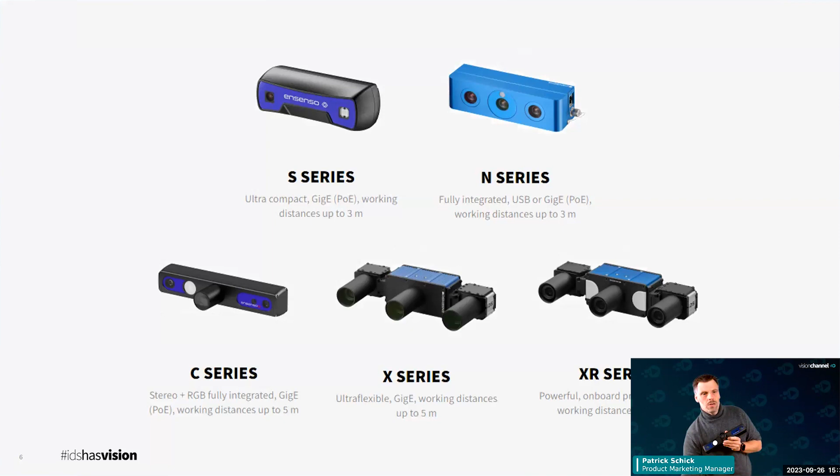But additionally to this, the Ensenso C also comes equipped with an RGB camera, as you can see here, which extends the usage of the camera to all cases where not only a 3D point cloud, but also an RGB image is necessary to do the job, or even the combination of both. Let's have a look at some applications which heavily profit from this feature later.

Besides the RGB camera, the Ensenso C is also equipped with an internal light to be able to take images also under not optimal lighting circumstances.

And last but not least, the Ensenso C comes in two baselines to cover working distances from 0.5 meter up to 5 meters. We have here the Ensenso C57-S with a baseline of 240 millimeters. And additionally, we have also an Ensenso C57-M, this one here, with a baseline of 455 millimeters.

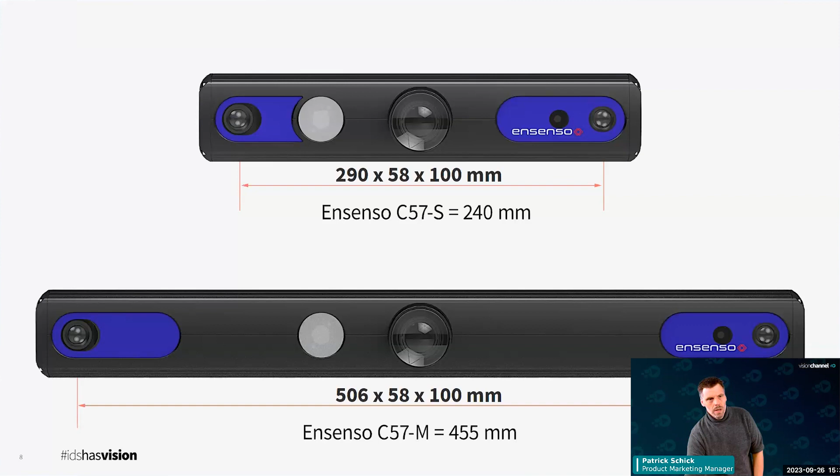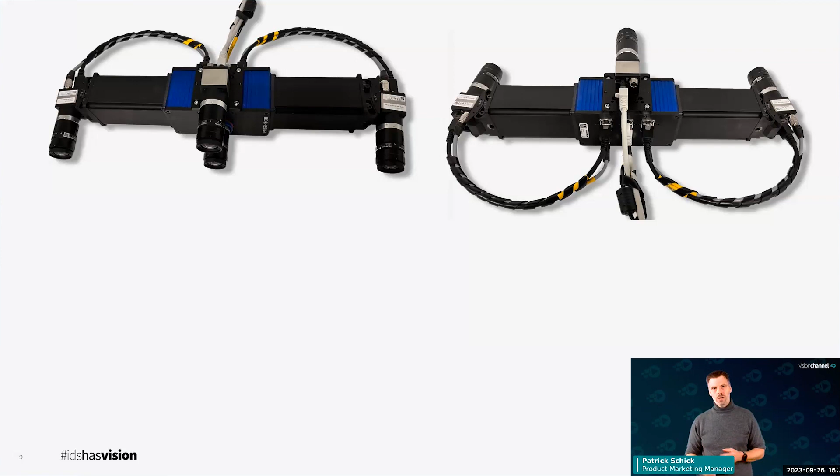To give you a glimpse of comparison, to summarize the first part of this section: if you compare the named features realized, I'd say you can immediately see that the C series comes as a fully equipped 3D and 2D RGB camera in a slim housing. And if PoE is used, only one cable, the Ethernet cable, is necessary to work with the camera.

I gave you here an example of how an Ensenso C, or Ensenso X, or also an Ensenso N setup would look like with the integration of an RGB camera, and how slim and fine it looks when you use the Ensenso C.

So we had a first look at the facts of the camera. Now let's have a closer look at applications which are realized, or can be realized, with the Ensenso C camera.

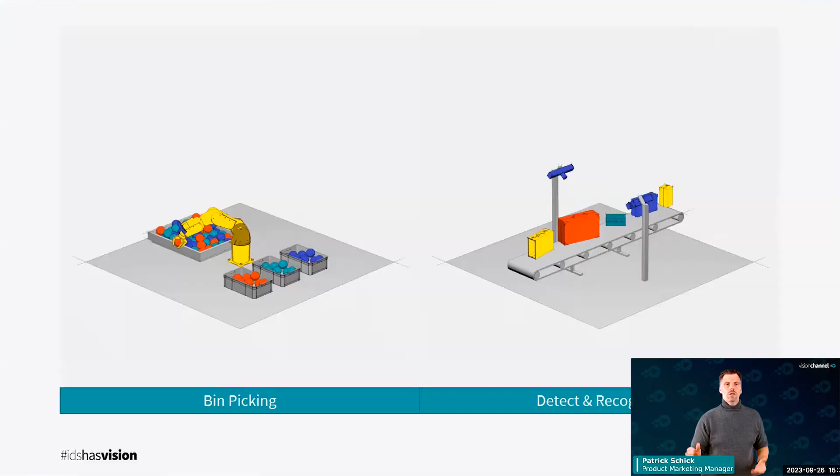First of all, as you can see here, we have a classical bin picking application on the left side. As with any other Ensenso camera, you can solve a bin picking application, but with the additional feature that here you have the possibility to not only pick the items, you can also sort the items by color, in this case, based on the integrated RGB camera.

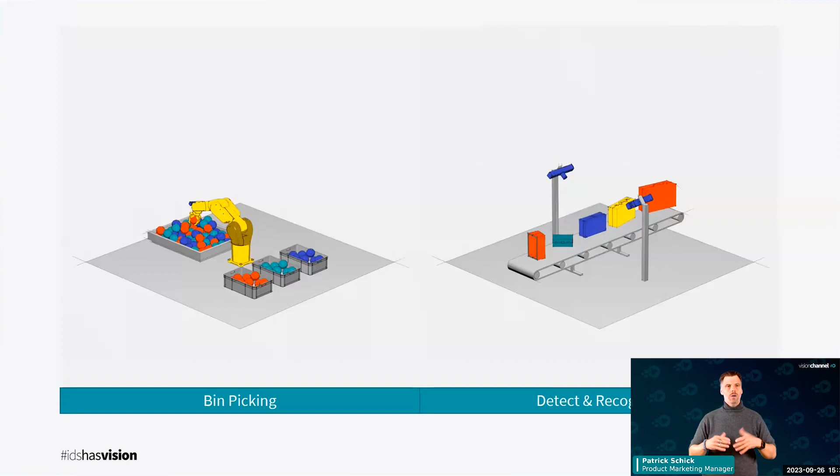So one value ahead, if you have an unsorted color box, you can just sort them also by color, pick and sort. On the other hand, we have the detect and recognize feature.

You can directly check, for example, luggages, or inside of logistics, if it comes to parcels, you cannot only check the size and measurements of the object. Additionally, you can also document the outline, and even also, again, we have an integrated RGB camera. You can also document the texture and everything else.

So the RGB camera also brings back to mind that with every Ensenso camera, you have access to a mono image. For example, as you can see in the image here, if you have in logistics parcels, you cannot only have the size and the position of the parcel. Also with the mono camera, you can read barcodes or text on these parcels.

And this is not a special feature of the Ensenso C camera. This is a feature of every Ensenso camera. Every Ensenso camera gives you the ability to use a mono image for further tasks.

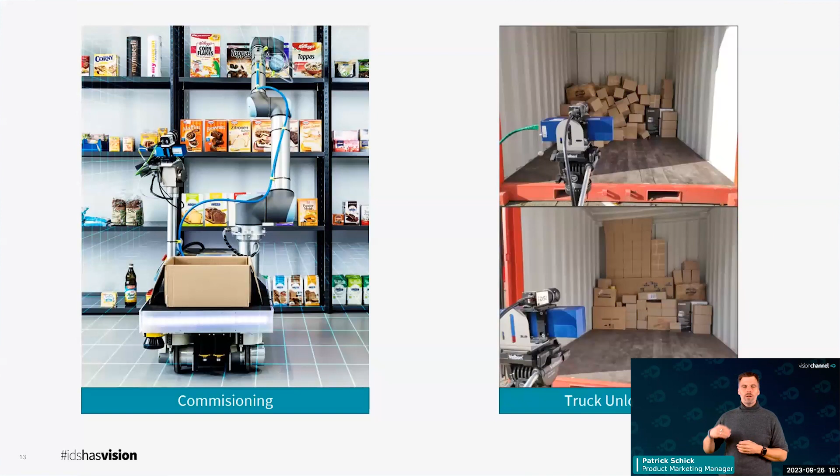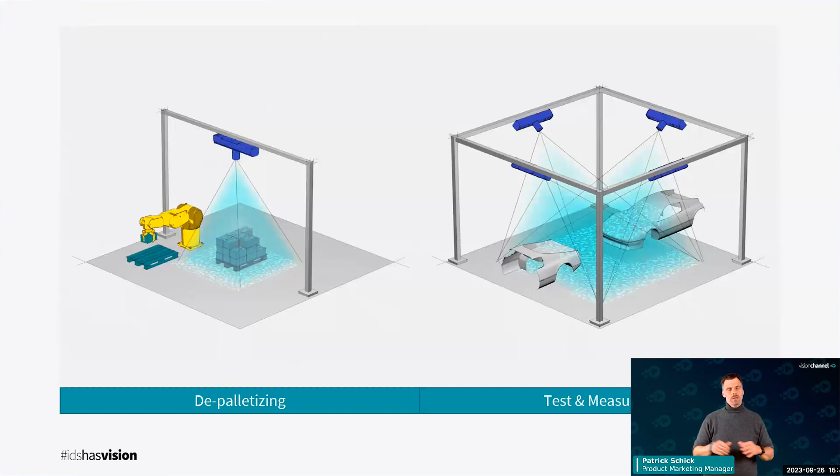So on the left side, we have again a depalletizing application. As you can see with the Ensenso C, if you, for example, use the one with the bigger baseline, you can completely oversee a pallet and get the quality to pick those single boxes from the pallet. On the right side, when it comes to test and measuring, you can also combine the Ensenso cameras together and then measure and check the quality of, for example, those car bodies.

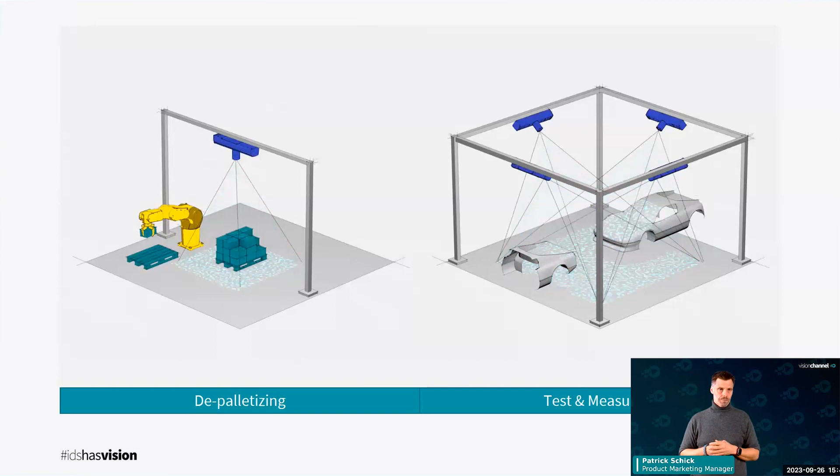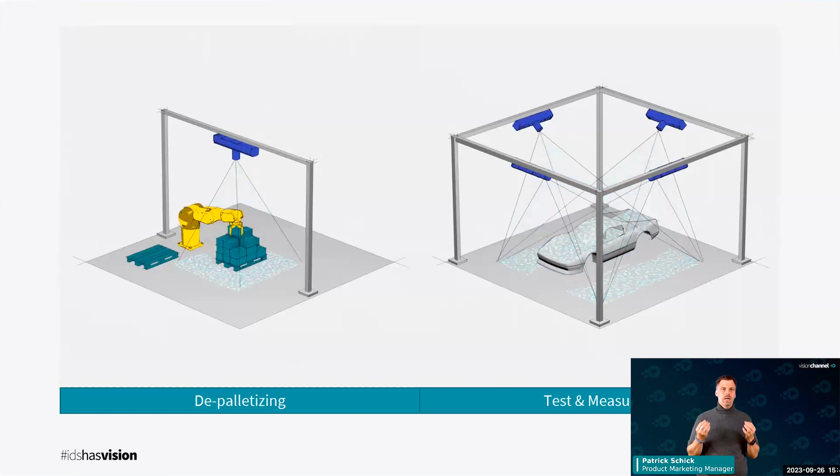Again, a feature which comes with every Ensenso camera: you can combine the Ensenso cameras into one system, let's say. So you can calibrate them together, and then you get one single 3D image out of, in this example, four Ensenso cameras. So with one shot, you can do a complete 360 degree check, for example, again, of these car bodies.

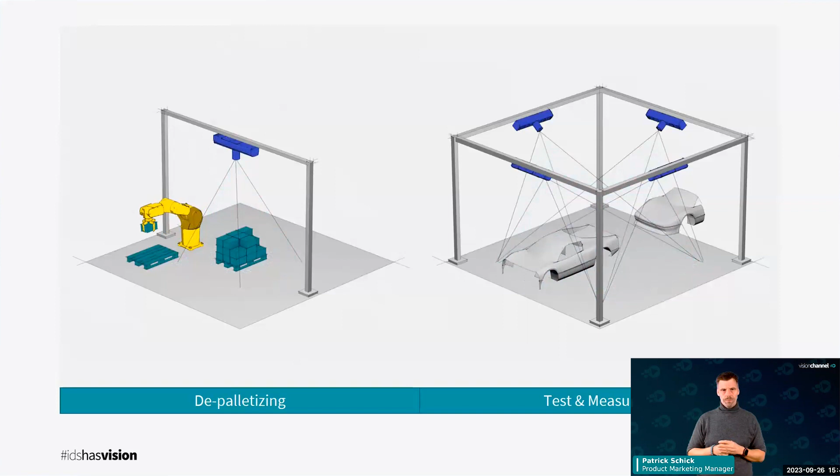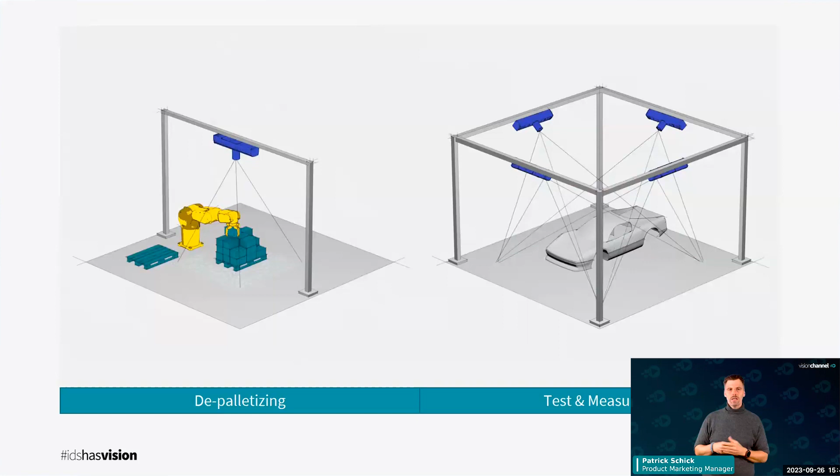I would like to show you one kind of application which a customer solved with the Ensenso C. We have here an application where automotive parts get picked and separated, loaded in a box on wheels with holders for the parts. The tolerance of these holders requires precise loading in the millimeter dimensions.

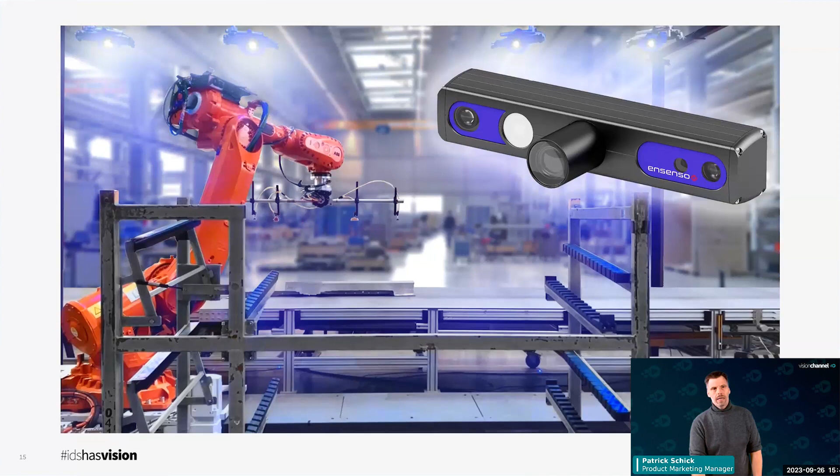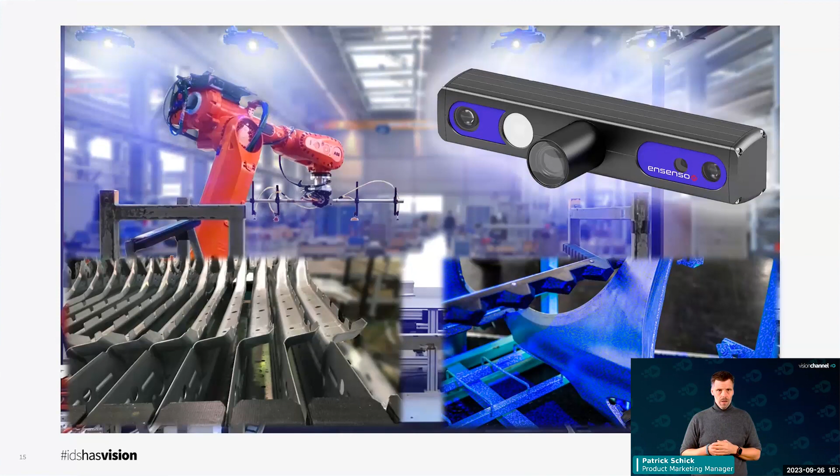In this application, the Ensenso C with the M baseline at 455 millimeters is used, and therefore they get the precise measurement that, as you can see on the left side here on the images, you can really precisely place the picked items in this container where they get transported to the next station. As you can see, there is not much space, but with the Ensenso C, you get the precise data to place them there.

Another feature used in this case - it's not only used as a pick application. Due to the 100 watt projectors, the bigger distance you can cover, and the high precision, the quality of these boxes where the items get loaded is also checked by the Ensenso C. If they do not meet the required tolerances, nothing will be loaded into this box.

So the Ensenso C is used for two different applications. First, a classical bin picking application with a high precision requirement on placement of the object. And on the other hand, as a measurement and quality check system to ensure that the boxes where these items are placed are in the right quality and in the best shape for it.

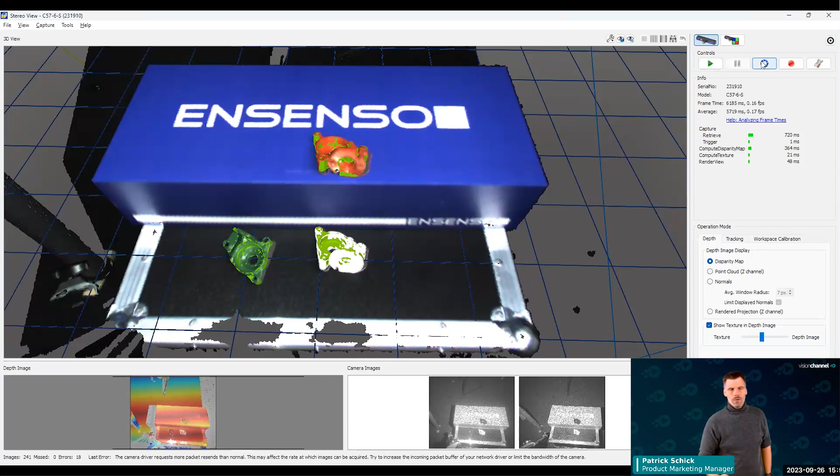So here we are in NxView, and we have here the visualization out of the Ensenso. I place something right here - I placed my iPhone now on this box. As you can see here, we have a 3D representation with the texture directly matched to the 3D data.

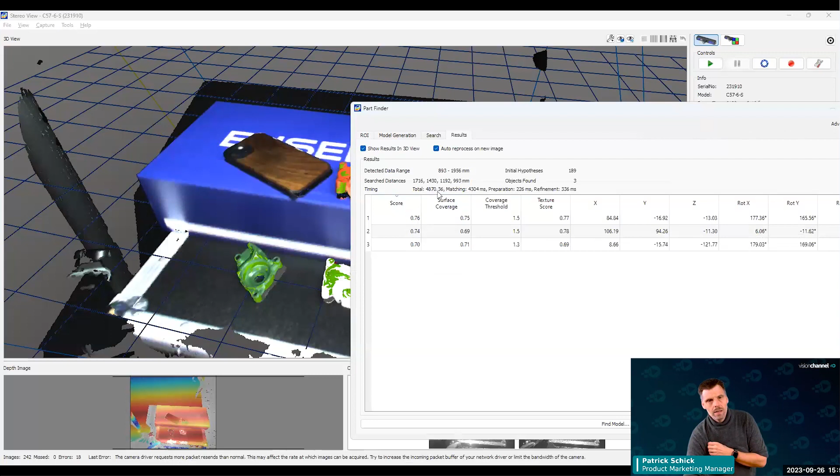Additionally, I've just activated Part Finder. Part Finder, which is included in NxView, enables finding known objects based on CAD data. I placed the three housings here, and as you can see, with high precision we find the objects. You get directly the pose out of it - not only X, Y, Z, but also the rotation, so that you get the necessary input for the next step, for example for your robot to be able to pick this.

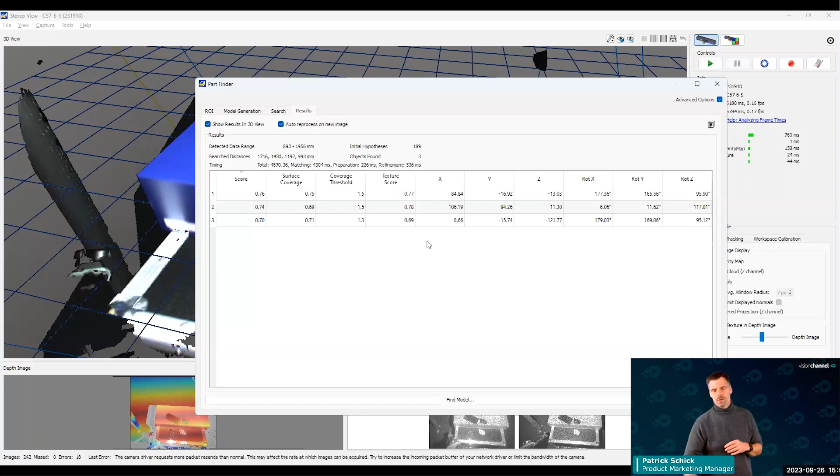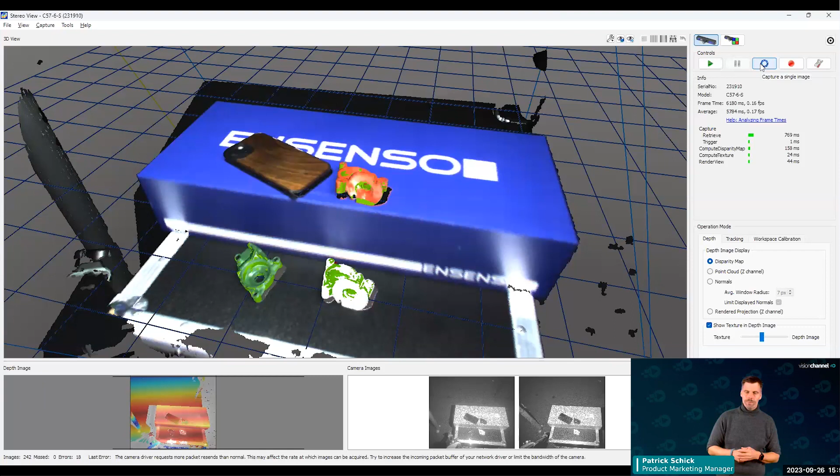As told before, with this application, we have red, white, and green placed here. You would be able to directly pick and sort them by color. And here you can see a bit more of my setup - you can directly also get the information of the 2D camera and use it for further applications.

So, also a short glimpse of our Ensenso C.

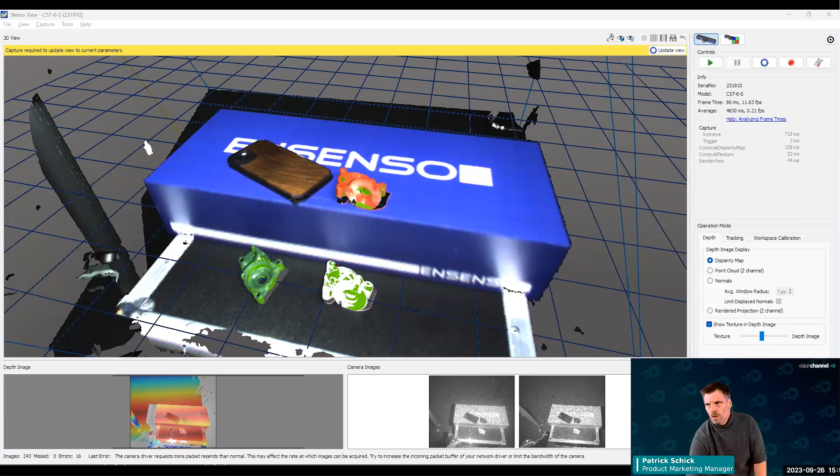So last but not least, let's shortly summarize the session before we come to your questions. We have a 3D camera in a fully compact housing with 5 megapixel resolution, which leads to a Z accuracy of 0.1 millimeters per meter. We have different baselines of this camera available, and an included RGB camera to extend the features of the 3D image, for example to get textures, to do AI, or to do more machine vision with these images.